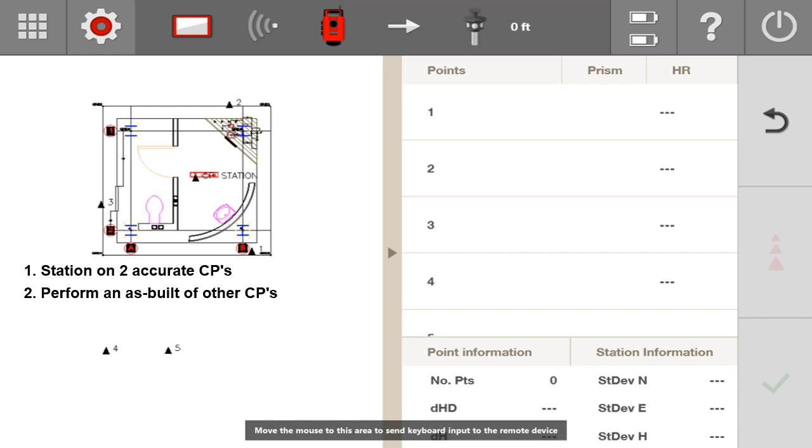In this video, we're going to review another advanced method for checking your control points that is a combination of stationing on two control points that you know to be accurate, and then doing an as-built of all the other ones. This allows you to check all of your control points based off only the ones that are accurate. And let me show you what I mean.

In my drawing, let's assume that I know that point 2 and point 1 are accurate. All the other ones I'm a little bit unsure about. I know that they are indicating that they're located at this location on the CAD, but I'm not sure if they're truly in the right spot. So I'm going to station on number 2 and number 1, and then I'm going to use the measure and record function to measure in the exact locations of where these are in the field, and I'm going to compare their differences to see which ones might be off.

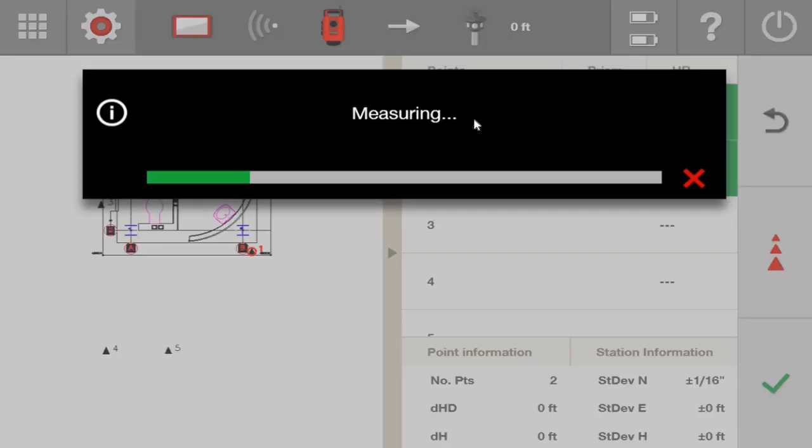So let's begin. I'm going to start by going to point 2 and measuring that control point. And now I'm going to go to point 1 and measure this control point. As I expected, I have a pretty darn accurate stationing, and even if I want to check before I continue, I will make sure that everything is essentially zeroed out. So now I'm going to go ahead and measure the other control points exactly where they were. So before I go on, I'm going to accept my stationing all the way through.

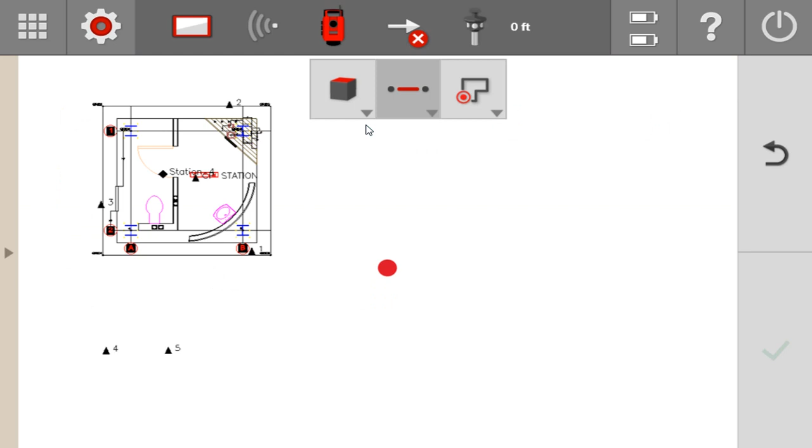I'm going to go to the measure and record function, and I'm going to go ahead and measure these in as measured points, and I'll just go ahead and keep them called the default MP1. So I'm going to now measure 5, 4, and 3 and see where they fall on my CAD.

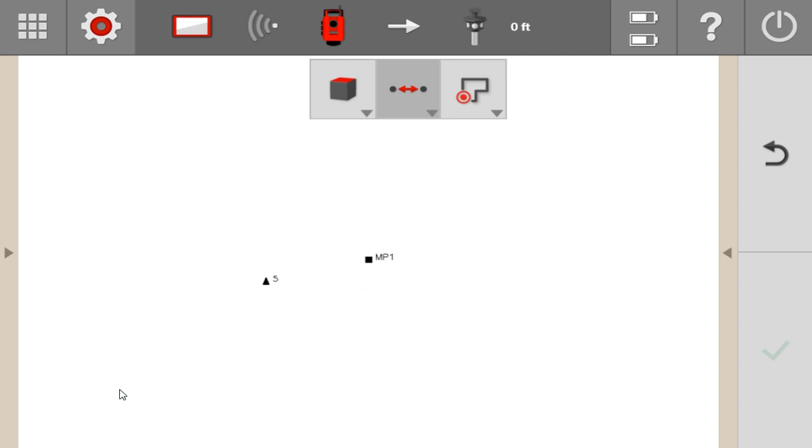So I just finished measuring point 5, and I'll go ahead and zoom in, and I'll observe that yes, there is a slight deviation, and I'm going to scroll down from the top window here, and I'm going to go to COGO, and let me just check that before I move on. There's a 3/16 difference between where I'm finding it in the field and where it's located in the CAD. Let me move on to the next point.

I have it pointing at the prism where control point 4 should be. Let me measure that location. And now again, I'll zoom in. There is a slight deviation, but the deviation is essentially 0, which means that I had to zoom in very, very far to get to that. So I'm going to be okay with that one. I'm going to assume that that one's actually accurate, and I'll probably even use it in my next stationing. So now let me move on to point 3.

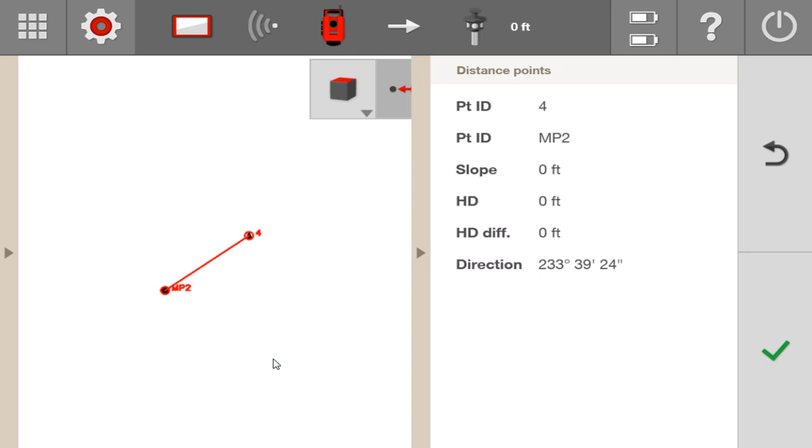So I turn my total station to point 3, and before I even measure it, I can tell that the crosshairs are not going to line up. So I'm already getting the inkling that this one's completely off, but I'm going to measure it anyway and measure that distance. I'm getting a 5 and 7/16 inch difference on that control point. So clearly my control point 3 is the incorrect control point out of this.

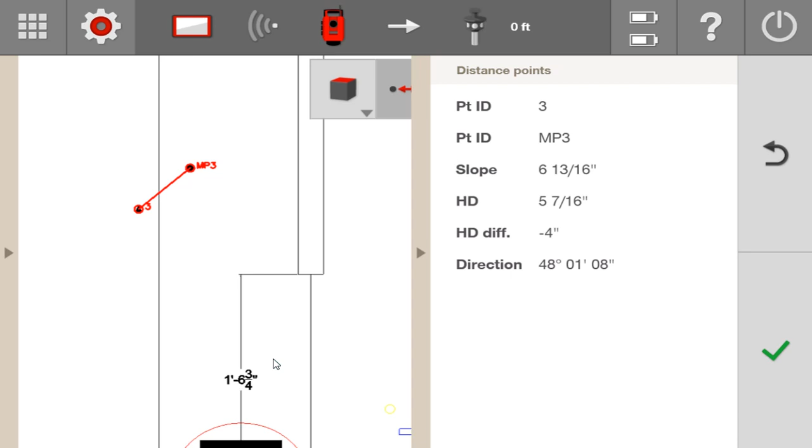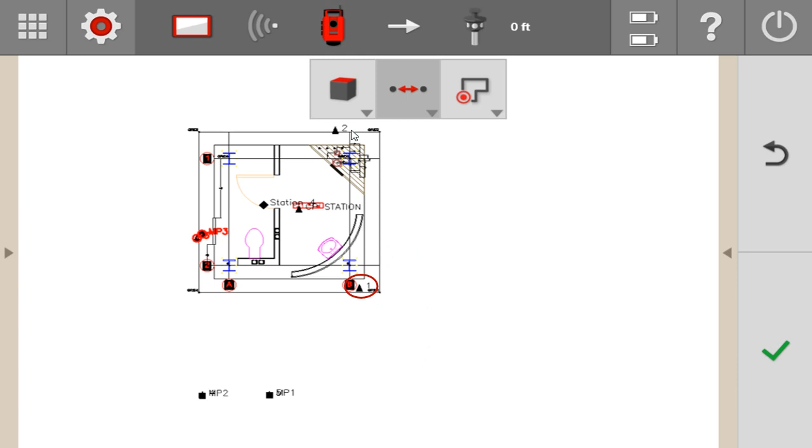So because I'm confident, I assume that point number 2, point number 1, and point number 4 are all correct. Point number 5 is slightly off by a little bit more than 1/8 of an inch, so I might use that one. But if I need to use 3 control points, I know I should be good using 1, 2, and 4. 3 I know is completely off and I should not rely on it, and I might be okay using 5. So what I'm going to do is restation on point 1, 2, and 4, and remeasure point 5 and point 3 to see if I line up in the same way. And if I do, I should know that my stationing is good.

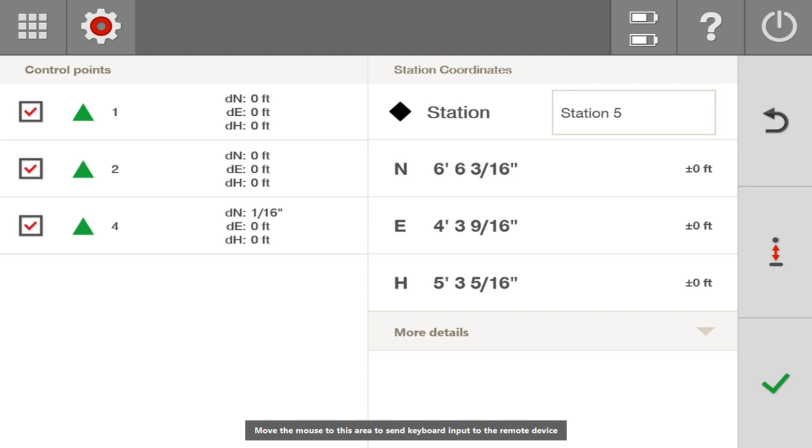So here you can see that I've made my stationing on points 1, 2, and 4. I'm going to press the green check mark, and it does basically zero out. I have a slight 16th deviation on one of the points, but I'm okay to accept that. And I'm going to go ahead and say check.

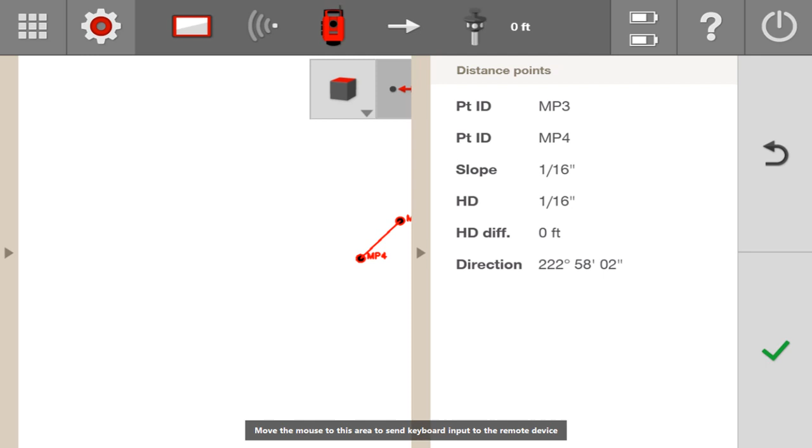Right now I'm looking at where I know control point 3 should be. I'm going to go ahead and measure that, and let's compare how this results from the other measured point that we made earlier. I'm zooming very far in, and you can see MP3 was the original point I made on the 2-point stationing, and MP4 is the one I just made, and let's see if there's any difference between the two. 1/16 of an inch horizontally. I'm willing to accept that and assume that point number 4 is indeed a good control point to add to my stationing. Now let's observe what happens with control point 5 and see if we get similar results.

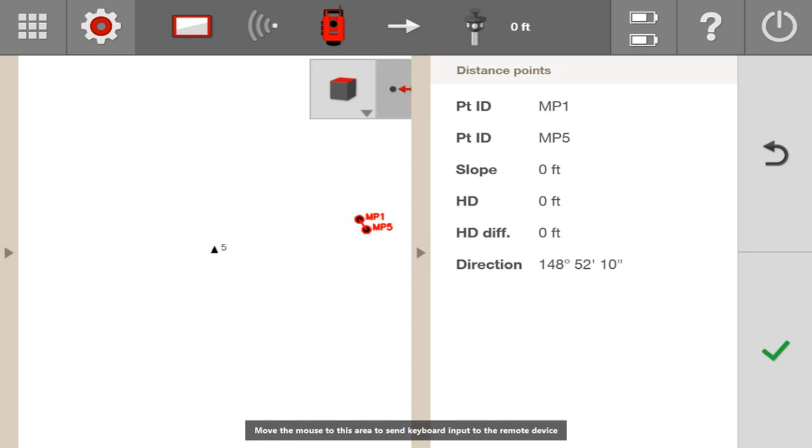I've zoomed in very far, and now let's go ahead and check it. MP1 to MP5, 0 deviation. I had to zoom in so far, and it's telling me that the distance between those is less than 1/16 of an inch. So again, because of this, I'm willing to accept point number 4, the one I added to my control points the second time for stationing, is a good stationing point to use.

So I encourage you to use this method on your own job site to observe your control points, station from the ones that you know are accurate, do an as-built, add control points for those that you think are accurate, do another as-built, and see how it's changing the point locations, and see if you're okay to accept it.